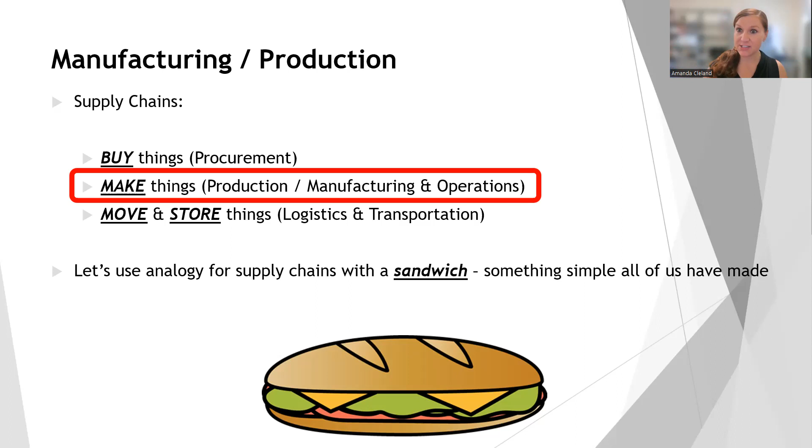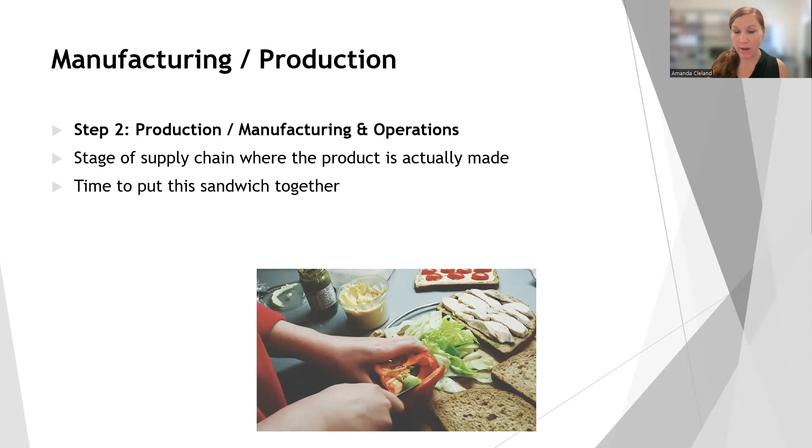So let's go back to that original sandwich analogy, something very simple we've all done in our lives. Let's talk about the production and manufacturing of making a sandwich. This is where we actually make our product, putting the sandwich together. Right now we just have a bunch of loose ingredients that mean nothing unless we put them all together in the right order, in the right format. This is production and manufacturing.

Some big things we've got to ask ourselves before we start the process: do we have the correct tools and equipment to make the sandwich? Do we have the right places to store the ingredients to keep them fresh until we actually make it? And the timing of when we make the sandwich - do I make it the night before, in the morning, two weeks in advance, or six months in advance and freeze it? Whatever the case, we've got to think about when we're going to do it.

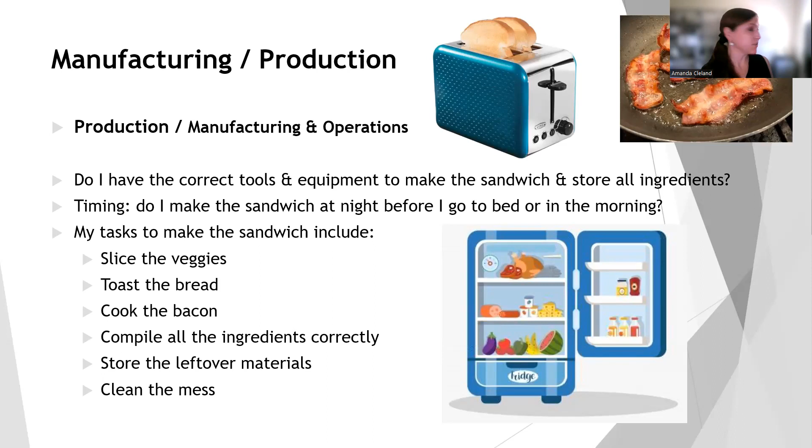Let's break down the tasks we need to make the sandwich - a really good quality sandwich, not like a crappy peanut butter and jelly. We're going to slice the veggies, toast the bread, cook the bacon, compile all the ingredients correctly and in the right order, and then store all the leftover materials and clean up the mess that occurs. These are all the things we've got to think about. Apologies, looks like the power has gone out, so bear with me.

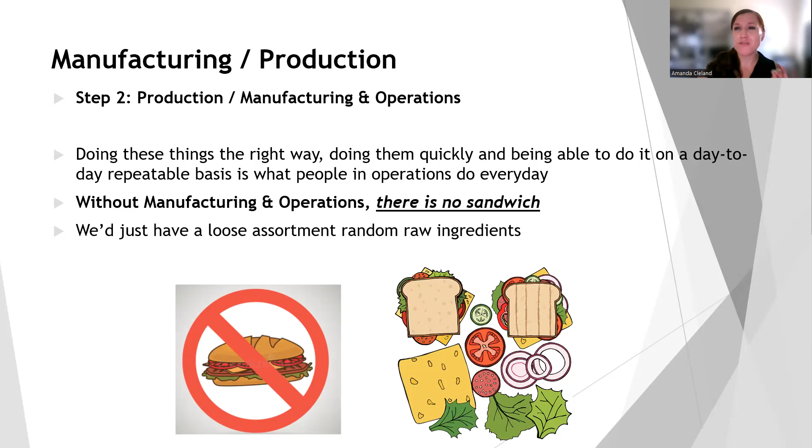Without production and manufacturing, we don't have a sandwich, a product, or a service - we'd just have a loose assortment of random raw ingredients, not a good quality sandwich. Doing these things we just talked about - when to make it, how to make it, storing things properly, compiling them properly, doing it the right way, quickly, and repeatably over and over again - is what people in operations do every day. This is where our product or service comes to life, so it's a very important stage of the entire process.

So let's talk about manufacturing. Let me move myself so you can see the actual definition. This is going to be very important - I guarantee you will see this on the test. Manufacturing is the large-scale production of goods that converts raw materials, loose parts, and components into final finished goods, using machines, tools, human labor, chemicals, etc. Manufacturing is a huge, integral part of the economy.

In 2021, manufacturing contributed $2.3 trillion to the US GDP, which is 12% of the US GDP. And again, we're not even one of the biggest manufacturing countries. It is over 10%, 12% of the US total GDP in 2021. So it's very important to our economy.

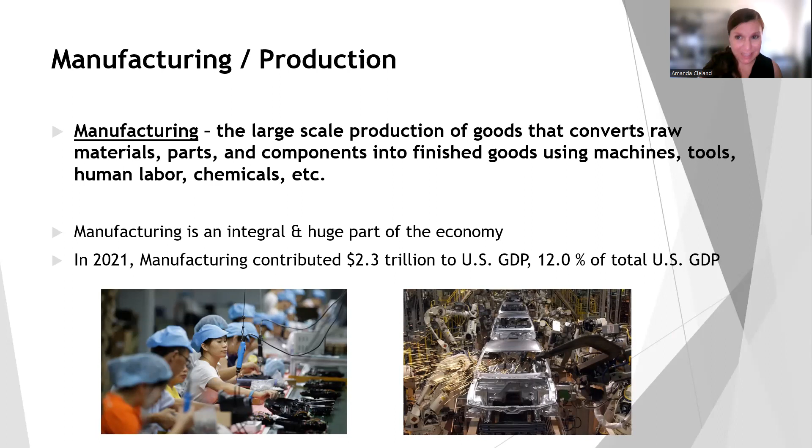Manufacturing is the large-scale production of goods that converts raw materials, parts, and components into final finished goods using machines, tools, human labor, and even chemicals.

So let's talk about manufacturing. The word manufacture is actually derived from Latin, as many words are, from the two words manu and factus. Manu essentially means hand, and what it translates to in Latin is made by hand.

Most objects that we use every day are the result of manufacturing. The computer I am recording this on is made through manufacturing. The device you are watching this on is made through manufacturing. The chair behind me is made through manufacturing. The mouse I have is made through manufacturing. The garments we are all wearing are made through manufacturing.

Manufacturing is that step within supply chains where products come to life. This used to be just loose threads, loose material, and now it is actually a garment that can be worn and is a final product. Manufacturing involves the processing and refinement of raw materials into finished products - it's making it come to life.

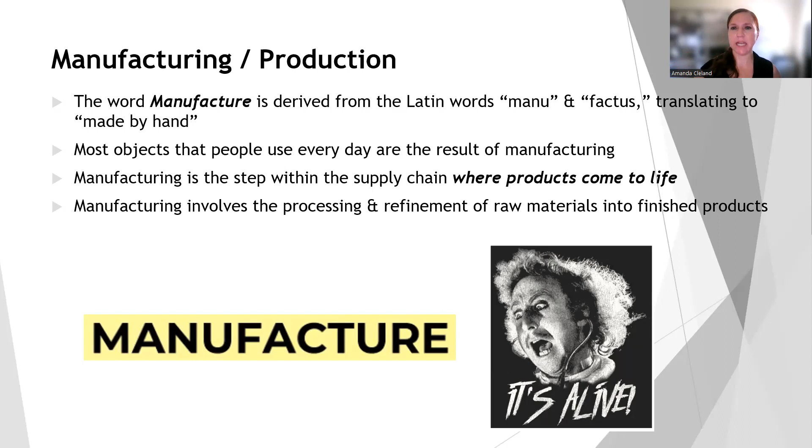Let's give some examples of raw materials. We've got raw iron ore - you can see a picture, just literally raw rock. It has no value to us just as a rock on its own. But once it goes through that manufacturing process, it becomes a metal good that is of use to us. I think the metal good I have here is some patio furniture where you can sit out, have a beer, have a burger with your friends on a nice summer day. The raw iron ore has no value to us, but once it goes through the manufacturing process, we get the final finished product that has value.

And then we've got wood - there's a ton of stuff made out of wood, lots of furniture. Just a log in and of itself doesn't have a lot of value. Yeah, you could use it for firewood, but it doesn't have much value for most everyday people. However, once it goes through that manufacturing process and becomes a quality piece of furniture, that has value.

And then all the foodstuffs that we eat - all those raw ingredients like flour, oil, milk, baking soda - you can't eat those just raw on their own. You've got to put them all together and cook them correctly to have that delicious Twinkie that you see there. So everything needs to go through some sort of production manufacturing process that adds value and creates that final product that is actually of value to us as the final consumer.

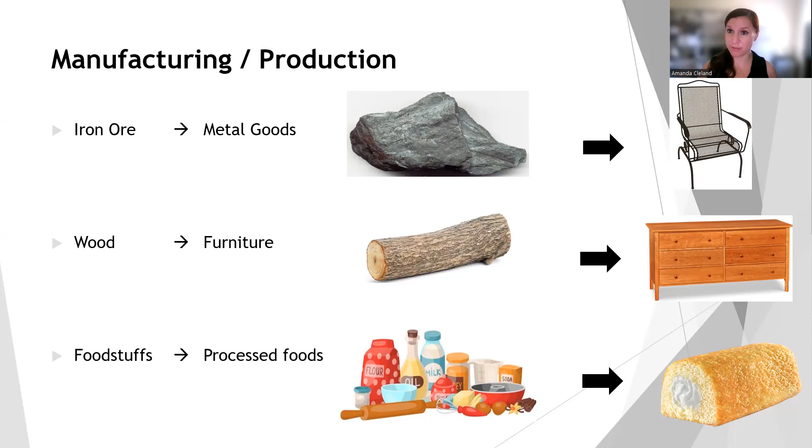Manufacturing converts raw materials into something more useful that adds value. You are not going to get a ton of value from a bag of loose flour, eggs, and baking soda, but you are going to get value from that final finished cake. This added value increases the price of finished products, and it makes manufacturing an incredibly profitable part of the business chain.

Manufacturing processes are used to make everything that we buy, ranging from apartment buildings all the way to the pen that perhaps you're writing notes with. So manufacturing is all around us, and it's an integral part of our economy.

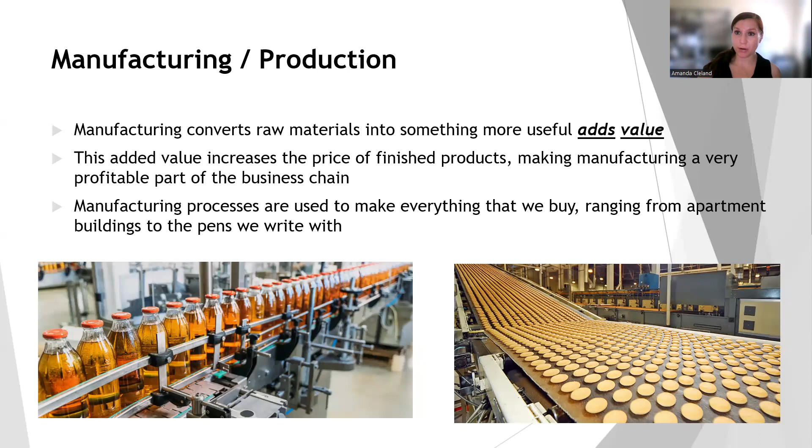So you guys know I love doing my countdowns. Let's talk about the top 5 manufacturing countries in the world, based on 2019 data - I couldn't find anything more recent, I'm assuming because of COVID, but we're going to use this data to begin with. This is from UN statistics data. So which countries, just taking a guess, do you think are the top 5 manufacturing countries in the world? Think about that for a little bit and we'll go through them. So we're going to start off with number 5.

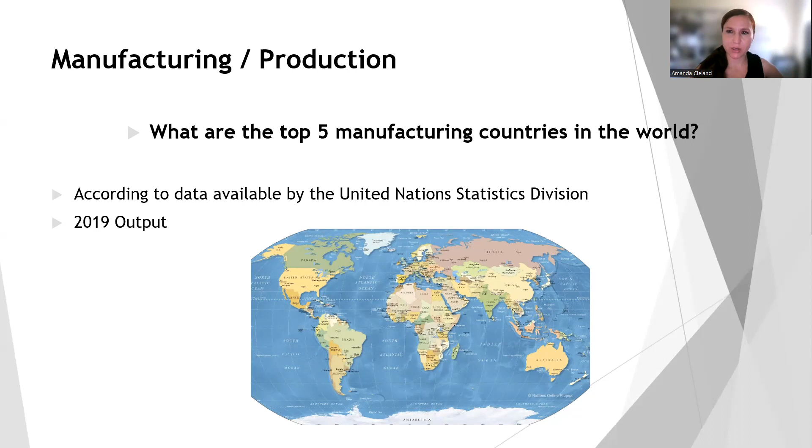Excuse me, we're going to start off with number 1. I think this does not come as a surprise to anyone: China. They have almost a third of the global manufacturing output, 28.7% of the world's global manufacturing output.

The United States used to be the world's top manufacturing hub, but China overtook that spot in 2010, so it's been almost 15 years since we've had that top spot. China, of course, has a lot of people, the most populous country with approximately 1.4 billion inhabitants, and a very entrepreneurial economy. It's one of the best places to do business due to its low costs. So number one on our list is China.

I don't think this comes as a surprise to many people. A lot of manufacturing happens in China. I think if you look on the bottom of a lot of products, it says 'made in China.' Not surprising whatsoever.

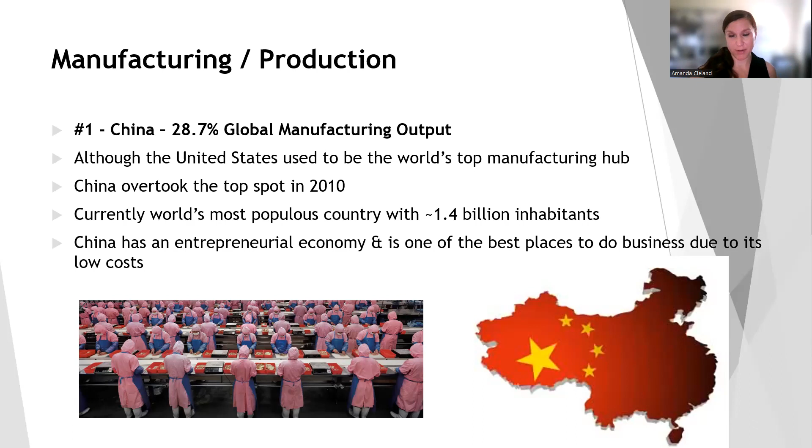So let's do number two. Number two is actually us, the United States. We have 16.8% of the global manufacturing output, and manufacturing comprises about half of all the exported goods we produce.

Our peak of manufacturing was 1979, many years ago, before I was born, before you were born. That was the pinnacle of manufacturing employment in terms of the number of Americans employed in the manufacturing sector. At that point, 19.4 million Americans were working in that sector. That's probably why a lot of your grandparents used to work in factories. However, we've got automation, robotics, computer technology.

We don't need as many people, so output has actually increased since then, even though the number of people employed in the manufacturing sector has decreased. So yes, the United States is number two in terms of the countries that manufacture the most.

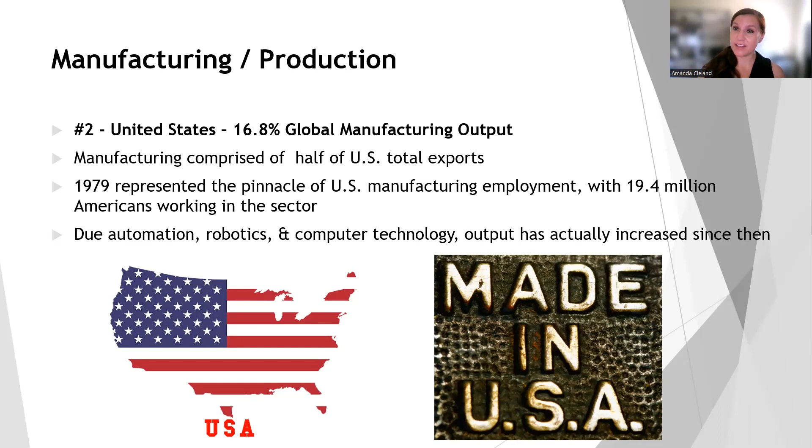Okay, let's go to number three. Oh, and here's some things about the types of things we manufacture based on the millions of dollars they cost: chemical products, computer and electronic products, believe it or not, food, beverage, and tobacco products, motor vehicle products, metal products, machinery, aerospace, petroleum and coal products, and plastics and rubber products.

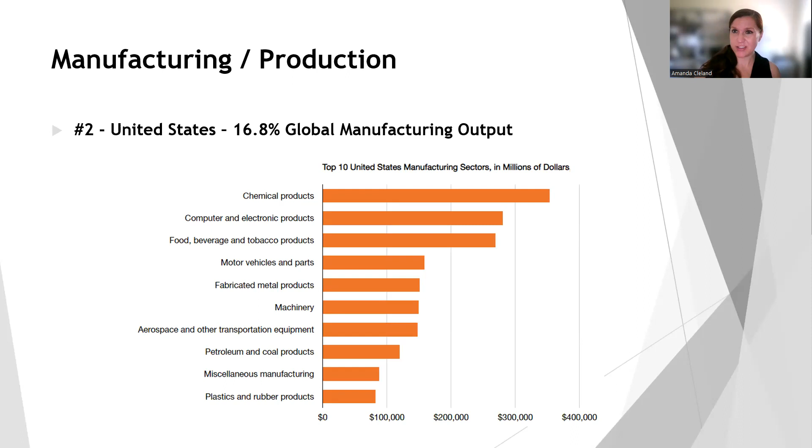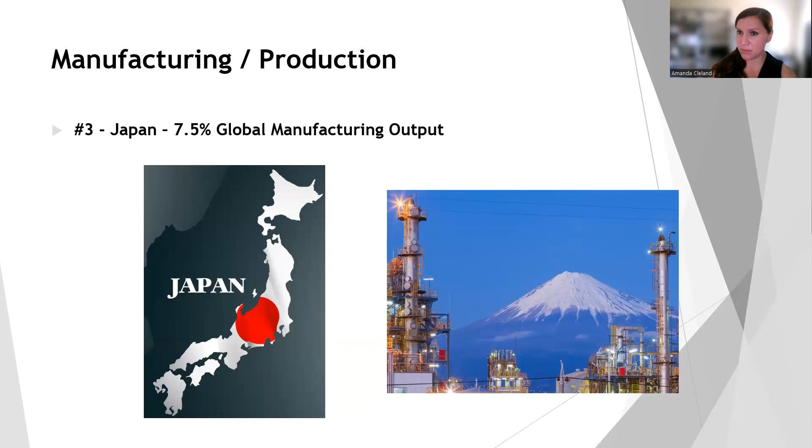So a wide variety of different things that we in the United States manufacture, just a little breakdown. Okay, number three is Japan. They have 7.5% of the global manufacturing output, which is really surprising because Japan is a very small country in terms of land mass and people, especially compared to China and the United States.

Number four, we've got Germany. They've got 5.3% of the global manufacturing output, and the German economy promotes the free market, so it makes sense, especially in both the business and consumer goods sectors. So Germany is number four on our list.

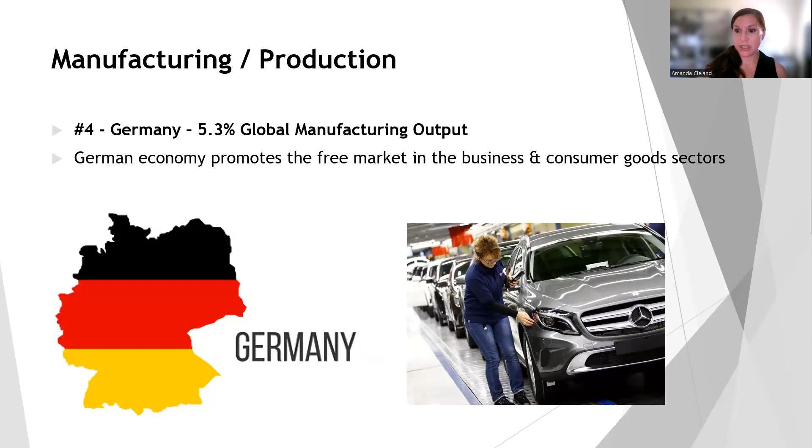And let's bring in the rear with number five: India. They've got 3.1% of the global manufacturing output. Usually when we think of India, we think of outsourced IT support or customer service centers when you call up to complain and get someone working in a call center with a very strong Indian accent. However, they are also known for their manufacturing. They had over 412 billion in 2019 from their manufacturing output.

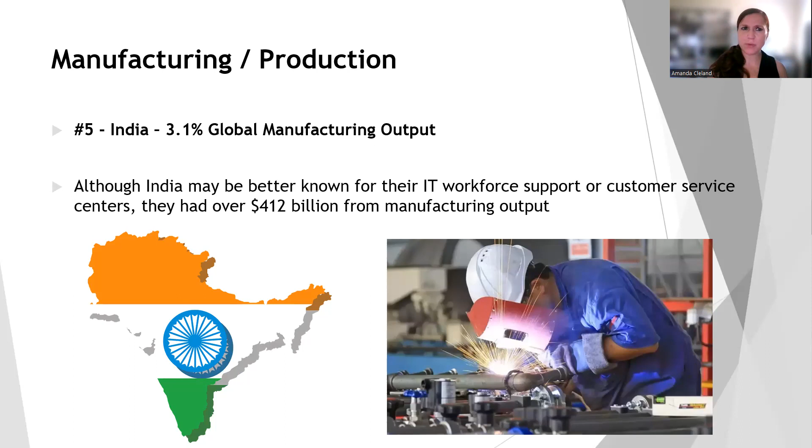So that is the top five: China, US, Japan, Germany, and India. I know a lot of people assumed smaller Asian countries would be on this, but you see the top five. Here's just a list of the top five so you can see it visually.

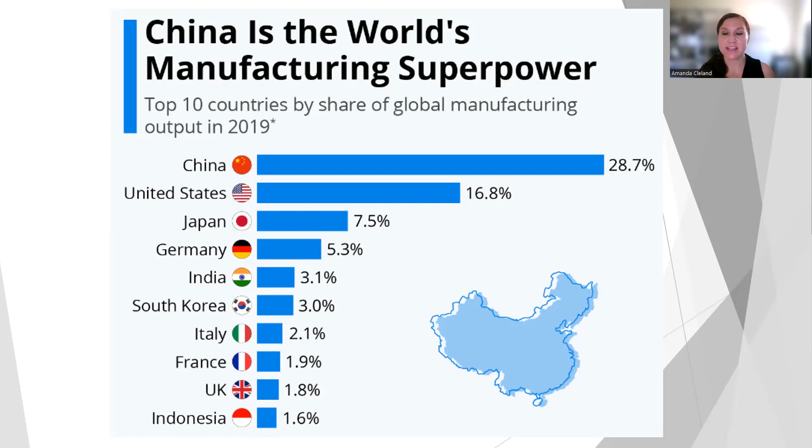And then after that, we've got South Korea with 3% of the global manufacturing output, Italy with 2.1%, France 1.9%, UK 1.8%, and Indonesia. So we actually see a lot of European countries on this list with Germany, Italy, France, and the UK, a lot of manufacturing taking place in these countries.

So let's talk about the history of modern manufacturing. Let's go back to the Industrial Revolution. This was a time when society moved from creating goods by hand and we started using machines.

This really occurred in Europe, primarily Great Britain, and in continental Europe, and also in the US. There's varying timelines that different experts will give you, but from about 1760 to 1840, and that marked the transition from human labor, everything done by hand, into machinery and chemical manufacturing processes.

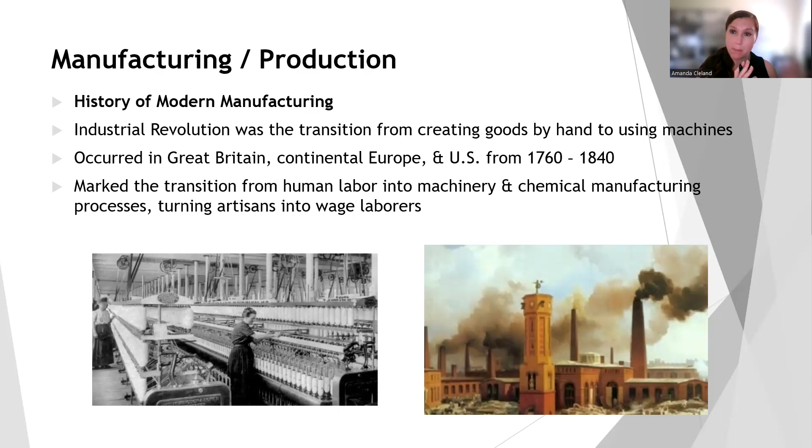So this turned artisans, people making things by hand, into wage laborers. Before the Industrial Revolution, everything was handmade products dominated all of our markets, and each individual product was made individually by hand by someone.

So you think, oh, how quaint, how nice, this must have been fantastic workmanship. But think about that—that is a very time-consuming process. And also it's going to be riddled with inconsistencies between the different final products, because each one is made by hand and there's going to be different things that happen with them.

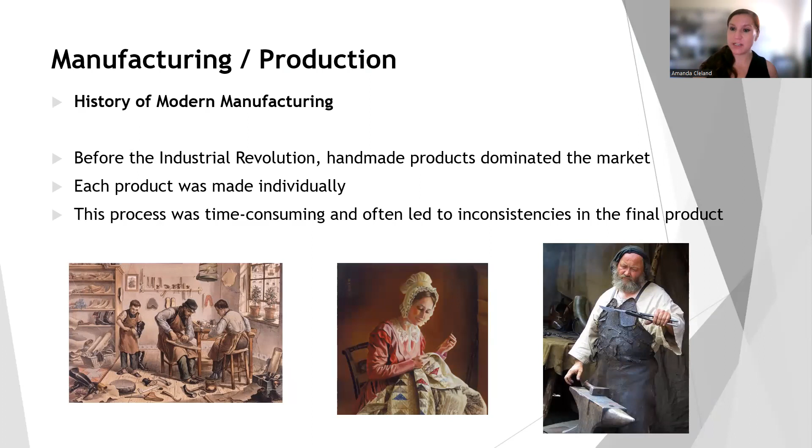So this is pre-industrial revolution. Then we had the invention and improvement of steam engines and other types of technology where companies could easily adopt machines in the manufacturing process. So we could increase the volume of finished goods, and it reduced the number of workers needed to produce them. We were really getting economies of scale—we could produce a lot for not a ton of money and not using a ton of labor.

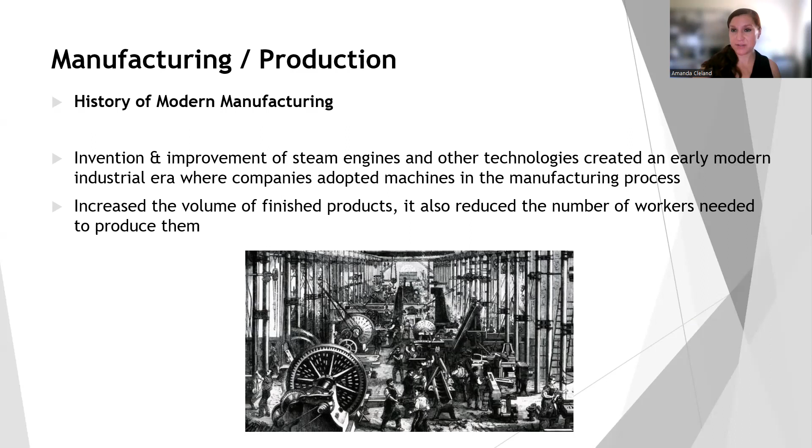This was a huge change in how things had been done before—a very labor-intensive, time-consuming process to make things—to much more streamlined. And we have economies of scale where we're making more with less.

So the next shift in manufacturing was the introduction of the assembly line in the early 1900s. The very first assembly line was patented not by Henry Ford—most people think Henry Ford, and we're going to talk about him—but it was actually patented by a guy named Ransom E. Olds in 1901. He was a car manufacturer, and he's actually the namesake for the Oldsmobile.

However, it wasn't the assembly line that we're used to now. His assembly line was stationary, so it stood still, and the workers would move around the assembly. But this was the first new approach in putting automobiles together.

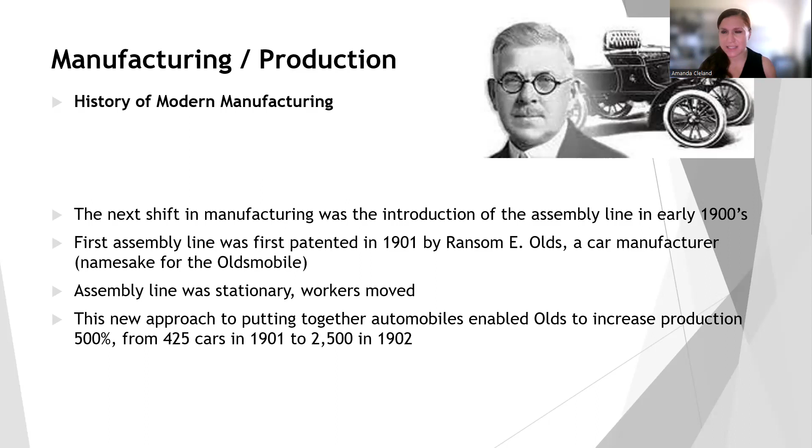And it enabled Ransom E. Olds to increase production by 500%. So in 1901, his company was able to manufacture 425 cars, and by 1902, using this stationary assembly line process, he was able to increase that to 2,500. Huge increase in production. Again, we take this for granted that cars would use assembly lines, but this was new and groundbreaking.

So the next one, we're going to talk about Henry Ford. He is credited as being the father of the modern assembly line, as well as the father of mass manufacturing in vehicles, in automobiles. He took the Olds assembly line system and improved upon it—he used moving platforms and a conveyor system.

And again, it was only just 10 years after Olds had patented his. So on December 1st, 1913, Henry Ford installed the first moving assembly line for mass production of the entire automobile. And this reduced the time to build one of his Model Ts from 12 hours to only an hour and a half—a huge improvement.

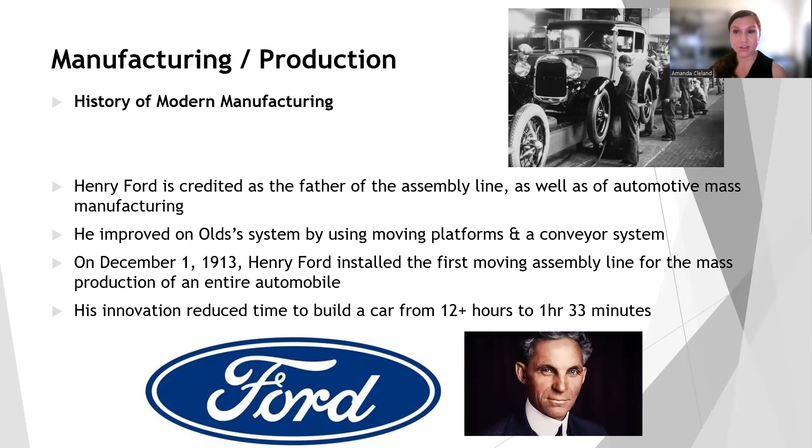What Ford did is he broke down the Model T's assembly into 84 very discrete steps. And he trained all of his workers, who were all unskilled—these weren't mechanics, these weren't experts in anything. They were unskilled workers, and all he did was teach them just how to do one of these different 84 steps. He also hired a motion study expert, Frederick Taylor, to ensure jobs were done more efficiently.

So how it worked in the beginning, back in 1913, is that the Model T vehicles were towed by rope and they would move them from station to station. This way, workers could simply assemble the different pieces as the partially made vehicles arrived at their different stations. Again, groundbreaking—it made everything so much quicker.

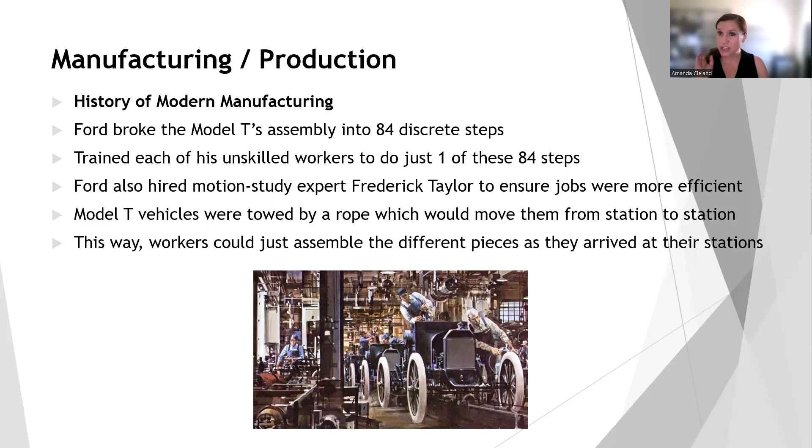And again, you didn't have to have someone who knew how to make a car all the way from bare bones to the final product. All you had to do was train them on one single step, which had never been done before. And prior to this shift in how he manufactured his vehicles, cars were an extremely expensive luxury item.

Only the elite of the elite, the 1%, the creme de la creme, could afford a vehicle. The Model T was fairly expensive when it was first released in 1909, before Ford introduced the assembly line process. Initially, the cheapest price was about $825, which is about $18,000 in today's currency. So not crazy.

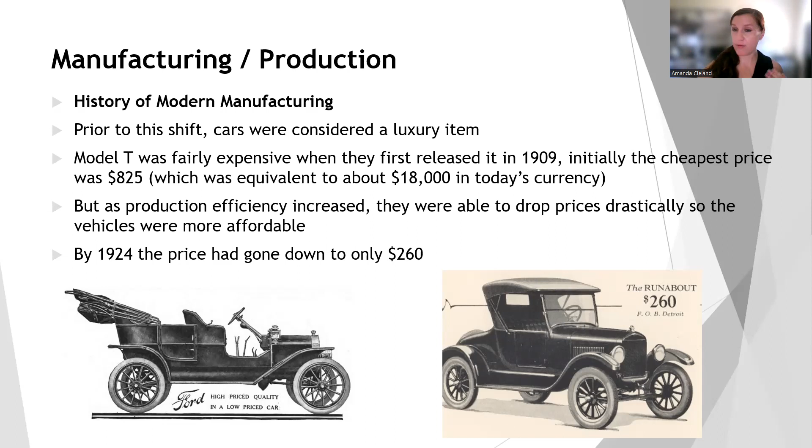But as production efficiency increased, they started using assembly lines. They were able to make it quicker, cheaper, and Ford was able to pass those savings on to the final consumer, so vehicles were more affordable. By 1924, just 15 years after that first car came out, the price had gone down to only $260, down by almost two-thirds. Crazy how affordable these became for just the average person.

Let's go to the next one. The next big breakthrough in manufacturing is Toyota. In 1948, Toyota Motor Corporation developed what they called lean production. We're going to talk a lot more about lean later in this chapter.

You probably have heard the term just-in-time, JIT manufacturing. That is closely synonymous with lean production, and also the Toyota Production System, TPS. This was developed by Toyota in order to improve the flow of production by finding, identifying, and eliminating any kind of waste. The Japanese word for waste is muda.

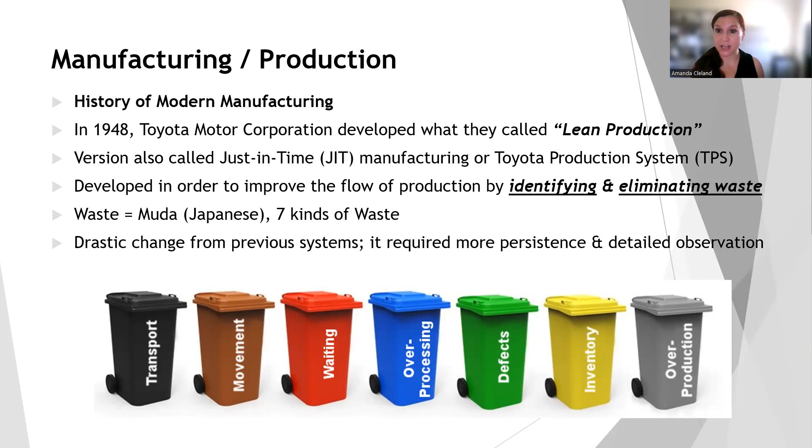Under lean production, there are seven different kinds of waste: transport waste, movement waste, waiting waste, overprocessing waste, defects waste, inventory waste, and overproduction waste. We're going to talk a lot more about that. But it was a drastic change from previous systems, and it required a lot more persistence and detailed observation. This was the next big breakthrough, in 1948.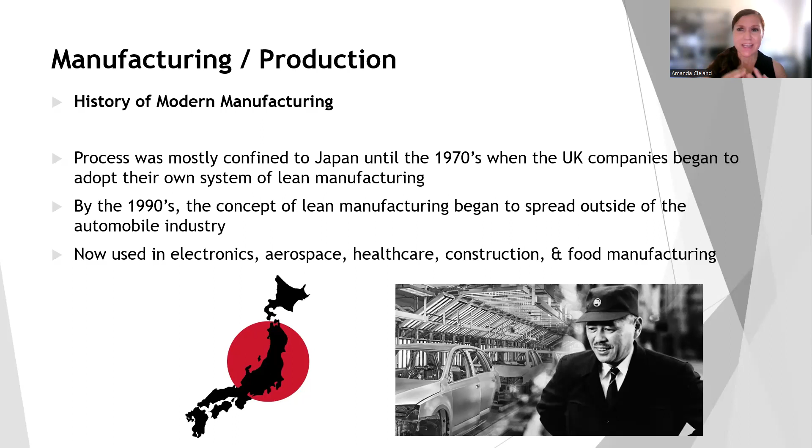The process was mostly confined to Japan until the 1970s, when UK companies decided to start adopting their own version of lean manufacturing. By the 1990s, the concept of lean manufacturing had begun to spread outside of the automotive industry. From 1948 to about the 1990s, it was mostly confined to the automotive industry, but by the 1990s it spread to all sorts of things. Now you see lean concepts used in electronics, aerospace, healthcare, construction, food, even services. So lean is used everywhere now.

Now we've got the rise of robotics, the rise of automation, and the rise of what we call smart manufacturing. The first robots started to appear on American assembly lines in about the 1980s. Today we have all sorts of automated manufacturing that uses advanced robotics, big data, and incredibly sophisticated computer software. It can complete tasks much faster and much more precisely than humans ever could, and it can do it 24 hours a day. They don't need to take bathroom breaks, they don't need to rest. So this is where we're at now: the rise of robotics, automation, smart manufacturing.

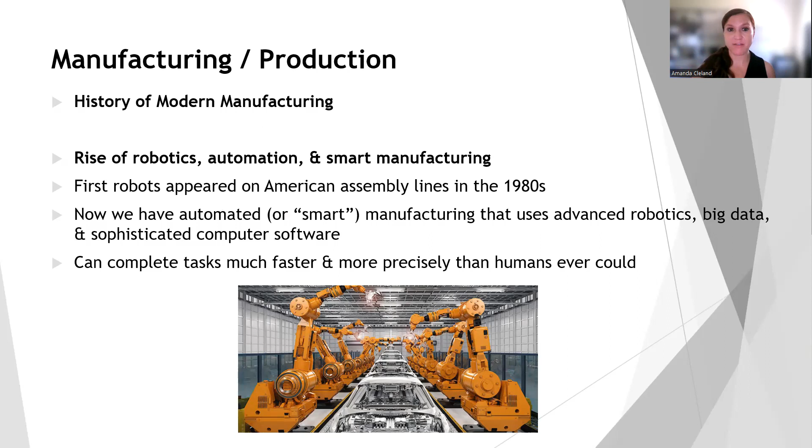Okay, so we've been talking about manufacturing. Now let's talk about production. Again, the two are very closely related, and we're going to talk about what the differences are.

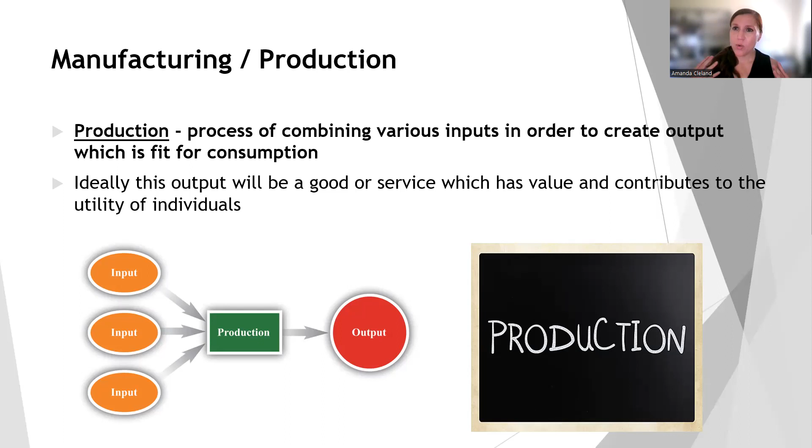Production is the process of combining various inputs in order to create output which is fit for consumption. We're going to have a final product. Ideally, this output is going to be some kind of good or service which has value and contributes to the utility of individuals. So again, very closely related—it sounds very similar to the definition of manufacturing, but we're going to talk about what the difference is between production and manufacturing.

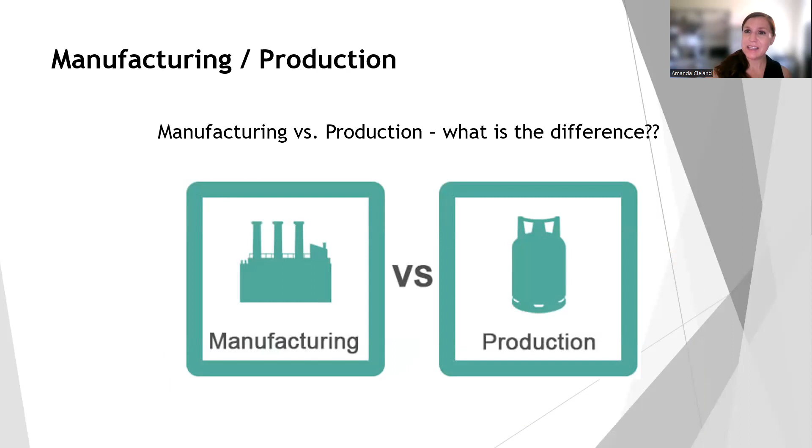They sound very similar, right? Manufacturing, production—we're talking about them all now. Let's talk about what the difference is, and this is going to be very important. Every type of manufacturing falls under the production umbrella, so every type of manufacturing is production.

The biggest difference is that in manufacturing, we need machinery—there is going to be machinery used. In production, machinery may or may not be used. That is the big difference: manufacturing uses machines, production may or may not use machines. Also, in manufacturing, the result is a good, only a good. In production, the final result can be a good or a service. So these are the three big differences between production and manufacturing.

So, very important to remember, and I guarantee there will be a question on the final with this: know the difference between production and manufacturing. Manufacturing requires machinery, production doesn't necessarily need it. And in manufacturing, the final product is goods, whereas in production, the final product could be goods or services.

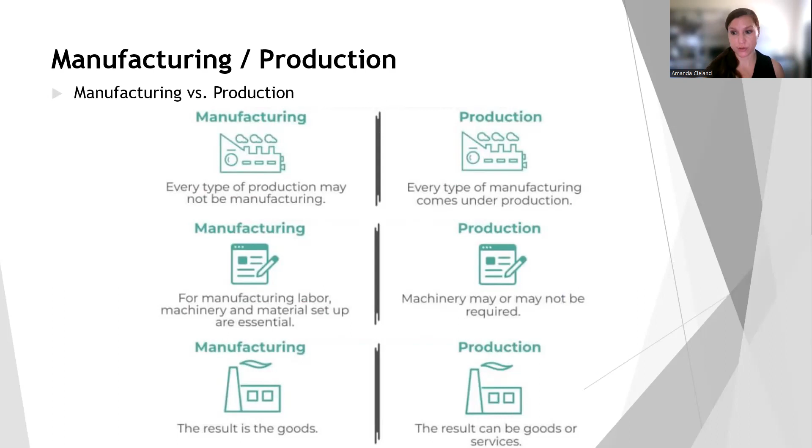Let's talk about some different principles that we can apply in manufacturing and production. Some products are manufactured according to forecasts, where they're not going to have specific sales orders already input. We're going to use our sales forecasting that we talked about many lessons ago. Other product manufacturing only starts after we actually receive a sales order.

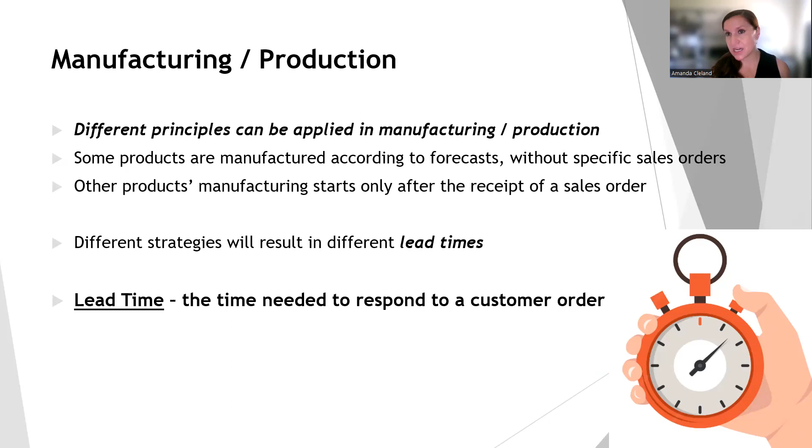Different strategies are going to result in different lead times. A lead time is the time that we as a business need to respond to a customer order—from the time you input that order, to the time we actually deliver it to you. That is the lead time.

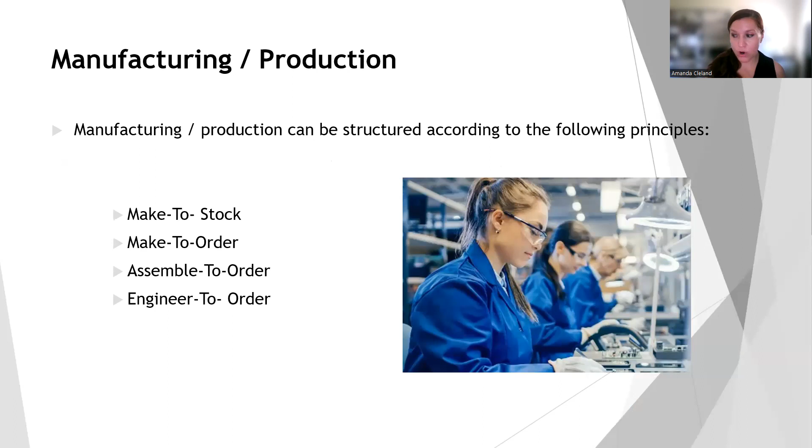We can structure these according to different principles. We could either do make to stock, make to order, assemble to order, or engineer to order. Let's talk about all four of those.

Let's talk about make to stock first, and you're probably going to see the acronym MTS. This is the very traditional production methodology where we are going to produce products in advance and stock them as inventory. They're going to sit on a shelf somewhere until a customer actually buys them.

Oh, and the lights came on. Yay. And again, this is based on demand forecasts—we're going to do sales forecasts, and then we're going to manufacture according to that.

Usually our products are created in very large batches, and again they're held in stock—held in the back room, held on a shelf, held in a warehouse—until they're actually needed. Usually these types of products made with a make to stock methodology have a very low level of customer specificity, so you're not going to be able to put in special orders or unique things. They have a very high degree of standardization.

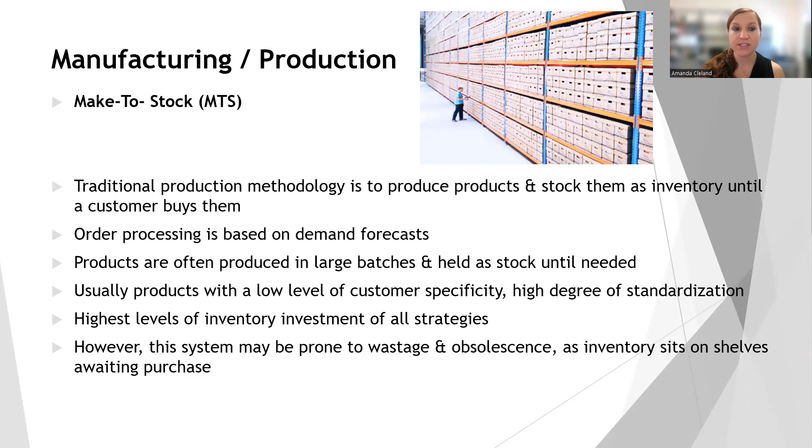They also have the highest levels of inventory investment of all the different production strategies. We're going to be spending a lot, and a lot is going to be tied up in inventory. Because of this, make to stock is prone to waste and prone to obsolescence, since we have so much inventory sitting on shelves awaiting our final customers to actually purchase them.

This really started with the idea of mass production in the early 20th century. It came from the practice of producing a high volume of identical goods at low cost, created in large numbers, in anticipation of future demand based on the forecast we create, and keeping them in inventory for a later sale.

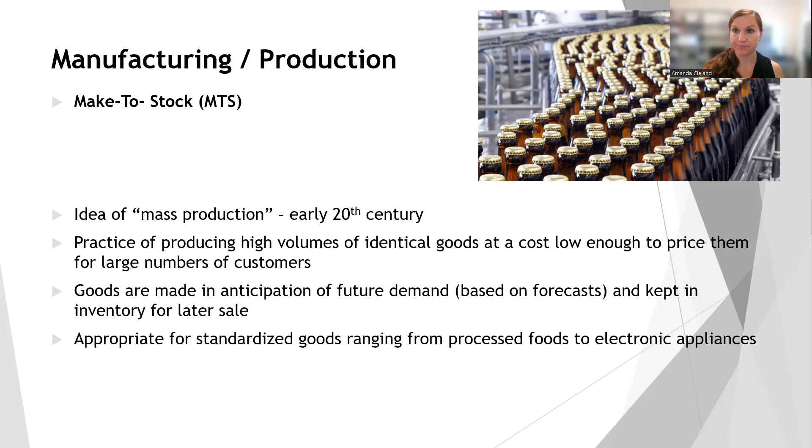It's really the appropriate production strategy for standardized goods, which can range from the foods we eat to electronic appliances. Really, fast moving consumer goods are a typical example of a make to stock item—toothpaste, soap, cookies, makeup. These are all non-durable consumer goods that sell quickly and at a relatively low price. Companies like Nestle, PepsiCo, and Procter & Gamble typically utilize a make to stock strategy. So these are the types of things we would use a make to stock strategy for.

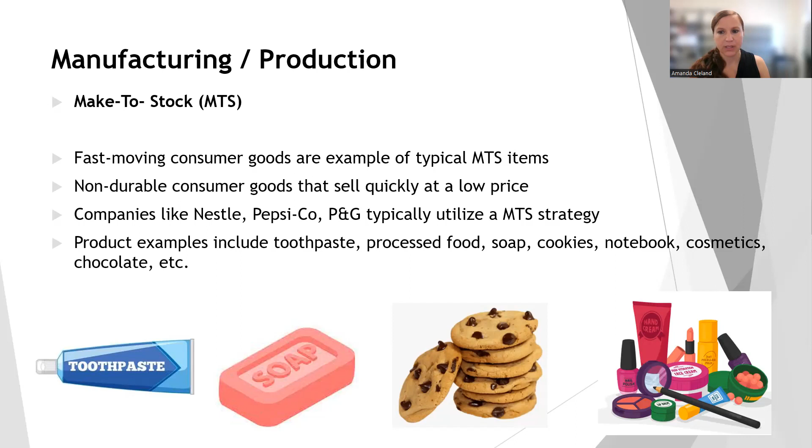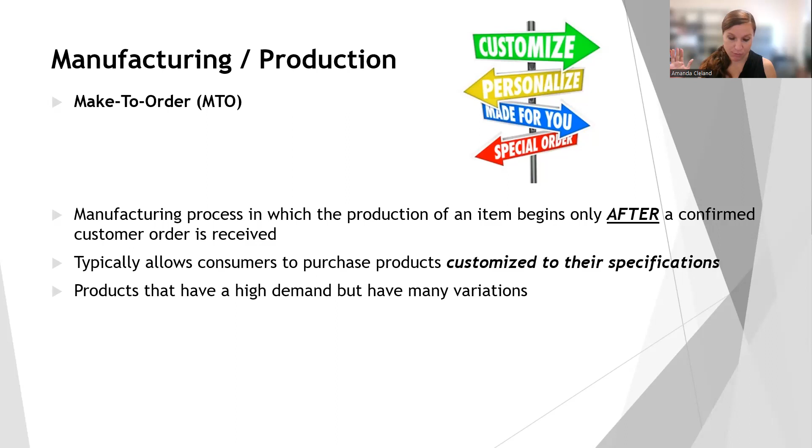Okay, now we've got make to order. The manufacturing or production process for these types of items begins only after we actually receive a confirmed customer order. These typically allow you to purchase products that are customized to your exact specifications—you can personalize it, special order it, customize it exactly how you want in a make to order process. These are products that usually have very high demand, but usually have a lot of different variations. If we made all identical ones, it would not be ideal.

The advantage of the make to order process is we're going to have a lot of enhanced customization level. And also we're not going to have a lot of excess inventory. We're only going to produce the product once a customer actually puts the order in. So we've got better productivity and a lot of variety in the things that we're doing. They're not going to be all identical.

The major drawback of this strategy is there's going to be a substantial time lag between the placing of the order and its delivery, because we've actually got to create it now. We don't start the process until the customer puts the order in. So it's really only ideal for commodities that have a very short manufacturing cycle, not years or months that you're waiting for your product. Hopefully it's only days, maybe weeks.

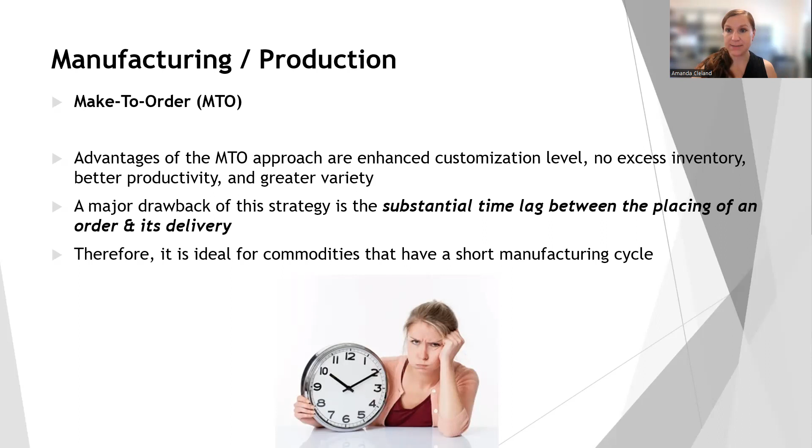The wedding industry, I know hopefully none of you are married right now, because weddings are very expensive and that's a big commitment to make. But the wedding industry is an example of an industry that thrives on make to order. Each wedding, each component of the wedding, is custom tailored to the whims of the bride and groom, probably the bride. So wedding dresses, flower bouquets, wedding cakes, favors, are all going to be made to order to the exact specifications of whatever you want. So the production doesn't start until that order is put in, and it can be made exactly how you want it.

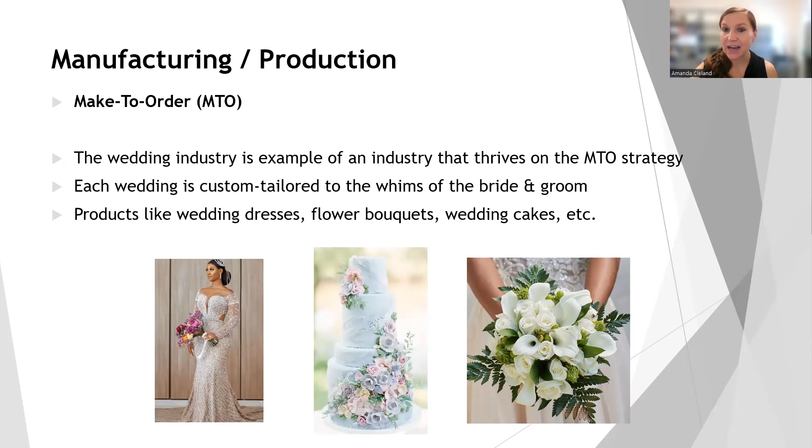So let's talk about assemble to order. This is kind of a hybrid, a combination of make to stock and make to order. What this entails is that the manufacturer strategy is where the manufacturer stocks up on all the parts, all the inventory, all the nuts and bolts needed to compile the final product. They have those on hand in inventory, and then they assemble the final product when a customer actually places an order. So products can be customizable to a certain extent. This relies on the company's ability to assemble and deliver the goods very quickly, and it usually takes a longer time to deliver the final goods to the customer, very much like a make to order strategy.

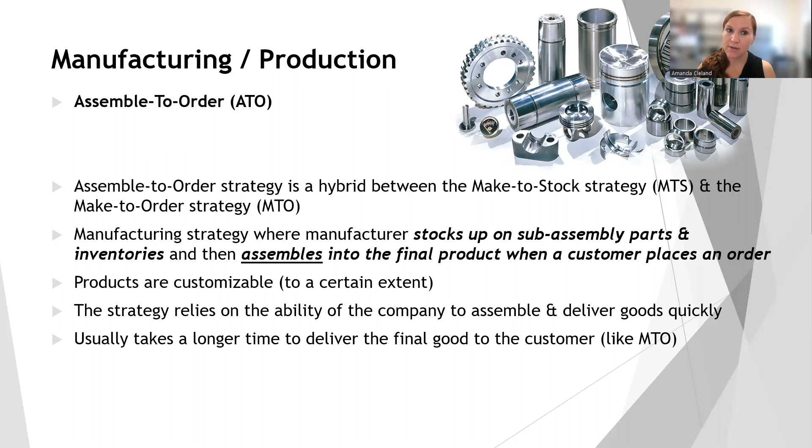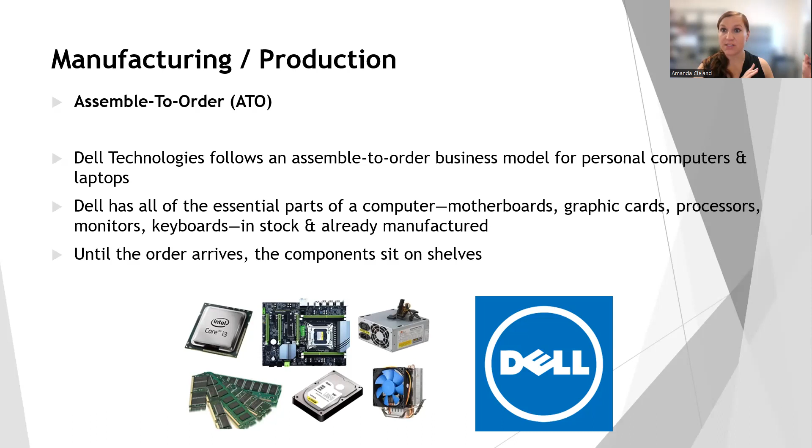So a company that employs an assemble to order strategy is Dell. Dell Technologies follows an assemble to order business model for personal computers and laptops. I actually have a Dell and I'm very happy with their assemble to order strategy. So Dell has all the essential parts of a computer - the motherboards, the graphic cards, the processors, the keyboards, the monitors - in stock, already ready to go, already manufactured. Until a customer actually puts in an order, the components sit on the shelves separately. They're not going to put them together in a computer. They're going to sit on the shelves.

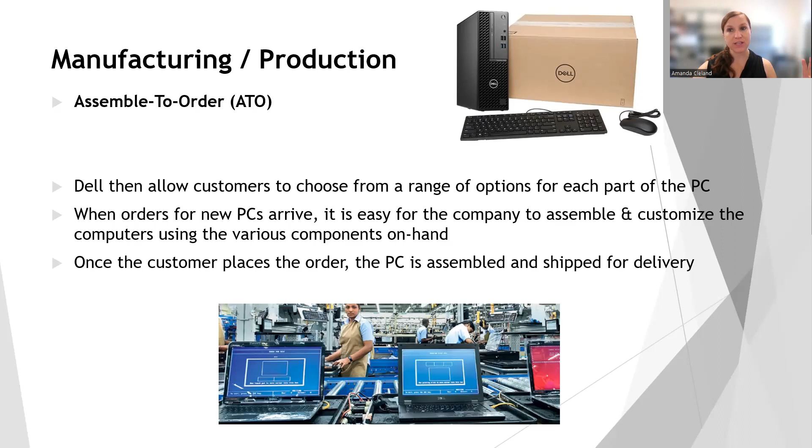And Dell allows the customer to choose from a range of options for each part of the PC, so you can choose from all sorts of different levels. When the customer finally puts in their order, the company has everything on hand and the specs that you've chosen, that you've customized, and they're going to put it all together, assemble it, and ship it out for delivery. So this is an assemble to order strategy where you've got all the components you need to create it on hand, sitting in inventory.

Our final production manufacturing process is engineer to order. This is commonly used in the creation of one-of-a-kind products, usually very sophisticated and complex type products. They usually have very unique specifications and are usually very complex. It involves the creation and engineering of a product to a customer's unique and usually very precise specifications, and again, the process does not start until after the customer order is put in. This is widely used in the aerospace sector, military, architecture, when you're creating buildings, when you're building a house - this is going to be engineered to order.

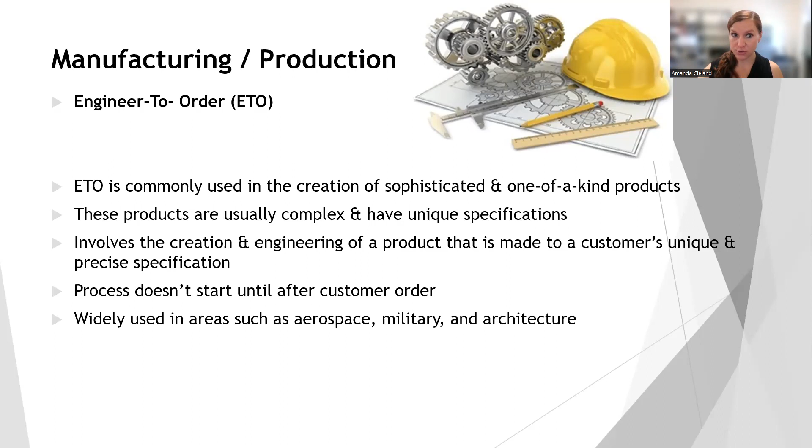So examples of engineer to order products include commercial heating, ventilation, and air conditioning (HVAC) equipment - it's got to be specified for the exact building, the exact specifications. Also electrical switchgear, power plant boilers, industrial cranes, aerospace manufacturing, so building airplanes, the defense and security industry, so making tanks, war fighter type weapons, and the energy industry. So again, usually very expensive, complex, sophisticated types of systems - not something simple like a candy bar or a computer.

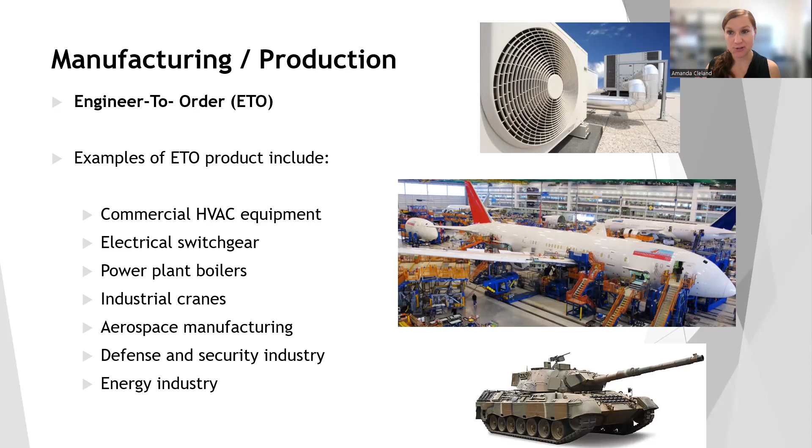These are usually buildings, airplanes, weapon systems, industrial cranes. So this usually employs an engineer to order system.

Now let's talk about push versus pull production. In push production, businesses produce products based on demand planning. Companies produce a certain amount of product to meet what we have anticipated as being the forecasted demand, and then we push our product onto the market from this established inventory, even if there is no customer order. So the company is pushing their product onto the customer. The customer did not order it yet, but we are pushing it onto them. So make to stock is a push production strategy.

On the other side, we've got pull production. This is based on actual customer orders, so production is pulled via that customer order. The customer is pulling the product out of us. In a pure pull type of system, no product is made until a completed order is made for it. There's absolutely no predicting or forecasting involved; we are depending solely on customer orders. So make to order and engineer to order are pull production strategies.

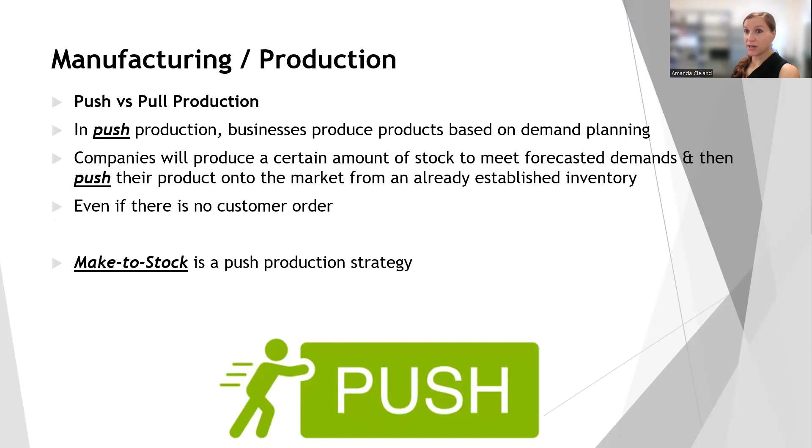So again, in push production we as the business are pushing our product onto the customer. And in pull production, the customer is pulling the product out of us as the company. These are the big two differences between push and pull. Make to stock is a push production strategy, and make to order and engineer to order are pull production strategies, where the customer is pulling the product out of us as the company.

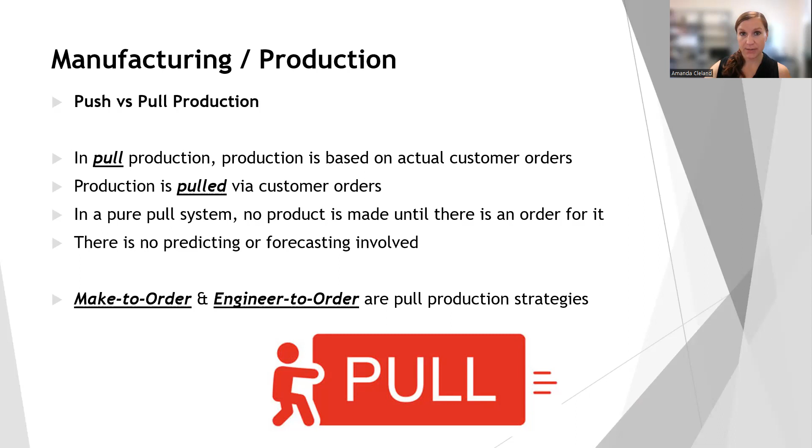A really key concept in production processes is the customer order decoupling point. This is where inventory is positioned within our supply chain. We've talked a lot about inventory - what that does is act as a barrier to separate the customer from the manufacturing process. And the closer that the customer order decoupling point is to the customer, the quicker we can serve them.

However, there is a trade-off. The quicker our response to customer demand, the larger our inventory holding costs are. If we have that inventory sitting right next to the customer, we're spending a lot in inventory holding costs - we're putting a lot of money into that inventory that's kind of just tied up.

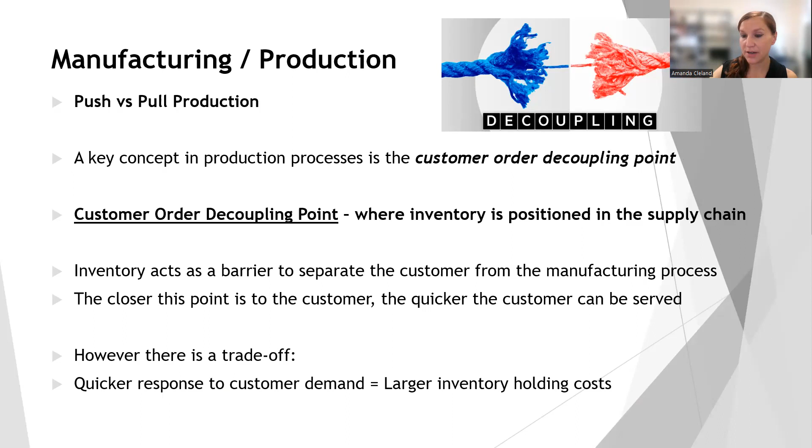Okay, so the next thing we're going to talk about is how manufacturing processes are organized. A manufacturing facility, the building that this is actually located in, can vary greatly in terms of how it's arranged. Ideally, we're going to have our equipment, our machinery, and our people all arranged in a way to make the production process as efficient as possible. And it's usually determined by the workflow pattern, the volume of products we're doing, or the level of product standardization - how similar all of these different products are going to be.

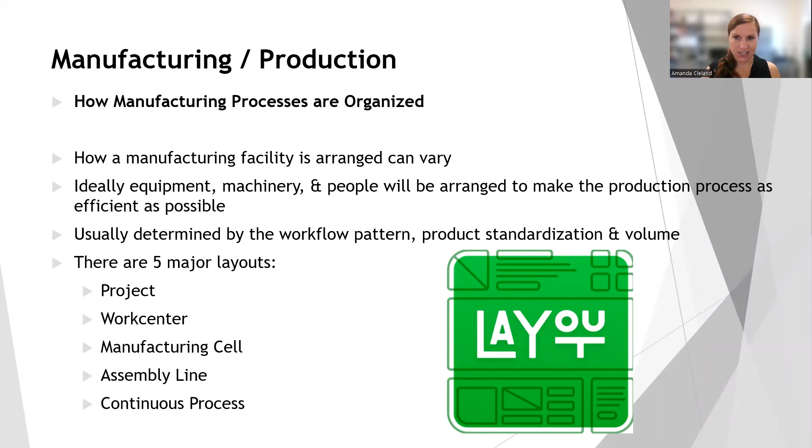There are usually 5 major layouts which we're going to talk about: the project layout, the work center layout, the manufacturing cell layout, the assembly line layout, and the continuous process layout. So let's go through each of these, starting with our project layout.

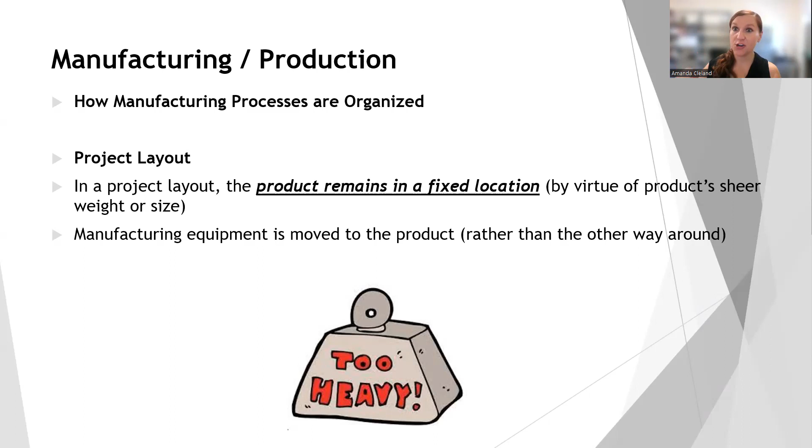So in a project layout, the product is going to remain in a fixed location, just because this product is so big, it is so heavy that it's got to stay still and we're going to move around it. So manufacturing equipment is then moved to the product rather than the other way around, like an assembly line, where we move the product and it goes to different workstations. It remains fixed just because it is so big, so heavy, in one set location.

The project layout is very common for construction sites, so for houses, for buildings, for bridges, the product itself is going to remain fixed in a project layout. Movie shooting lots are another example of this type of format. The product is fixed, and everything, the people, the equipment, is moved around it.

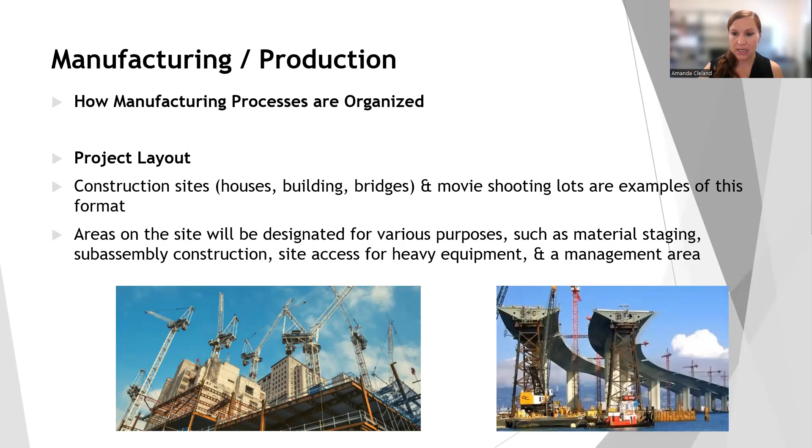Usually areas on this site are designated for various purposes. So you've got a staging area over here, maybe a sub-assembly area over here, maybe access for heavy equipment over here, maybe your management area over here. But remember, in a project layout, the product remains in a fixed location.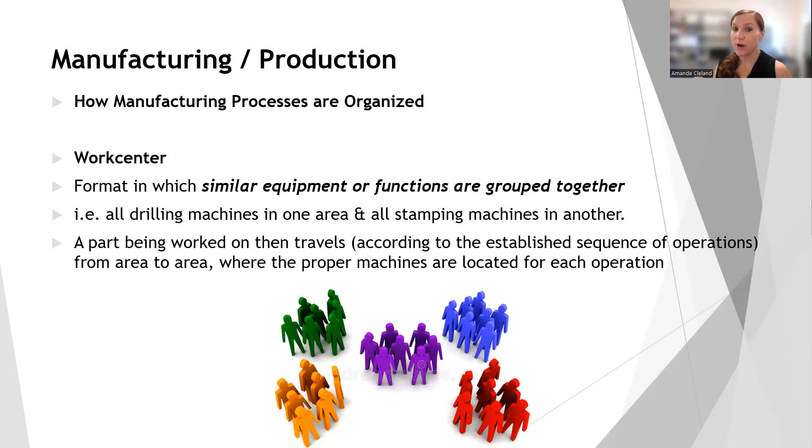Okay, our next one is going to be a work center. This is where similar equipment or similar functions are all grouped together. So for example, if we had all of our drilling machines in one area, all of our stamping machines in another area. A part being worked on will travel according to whatever sequence of operations we have, from one area to another where the proper machines are located for each operation.

A lot of times you'll see a work center, sometimes referred to as a department, and usually that is focused on one specific type of operation. We talked about drilling happening over here, stamping happens over here, or grinding operations and painting take place elsewhere.

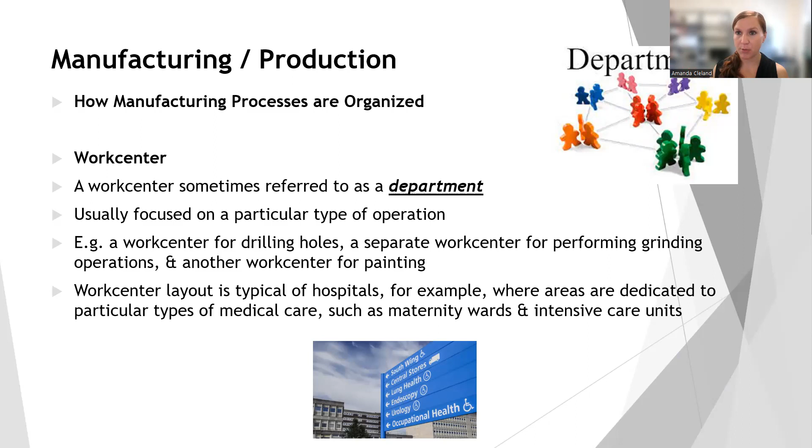An example of a work center type of organization is a hospital. This type of layout is very common in hospitals, where there are dedicated areas for particular types of medical care. So you've got the maternity ward over here, an intensive care unit over here, pediatrics over here. Each area or department is dedicated to one particular type of operation. So that is what a work center is.

And then we've got our manufacturing cell. I would call this like a mini assembly line if I were to compare it to anything. This is a dedicated area where similar products are all produced, so we've got very similar products that are going to be the end result of this entire process. And it's going to group dissimilar equipment together, usually because the product has similar shapes or processing requirements.

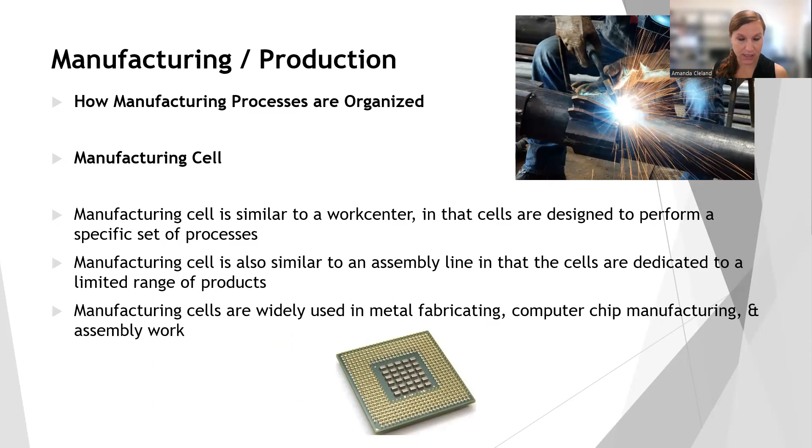A manufacturing cell is very similar to a work center in that these are designed to perform a specific set of processes. It's also similar to an assembly line in that the cells are dedicated to a limited range of products. These are widely used in metal fabrication, computer chip manufacturing, and assembly work. So that is our manufacturing cell: similar products produced, dissimilar equipment used.

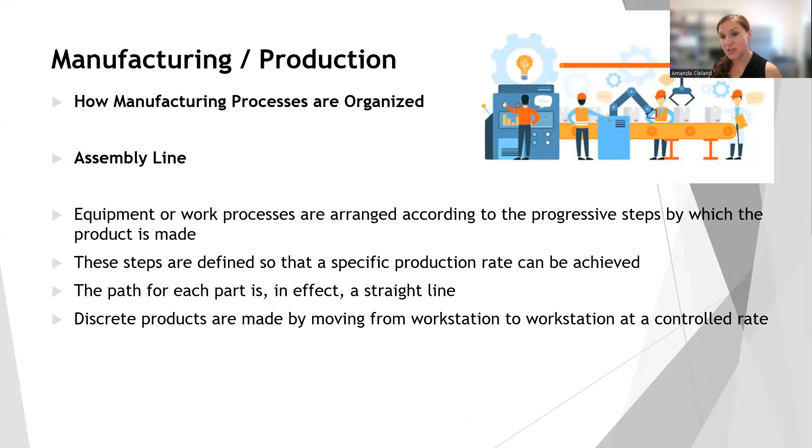And then we've got our assembly line. This is what we typically think of when we think of manufacturing and production. The equipment or work processes are arranged in progressive steps by which the product is made, and these steps are defined so that a very specific production rate can be achieved. The path for each part is essentially a straight line, so discrete products are made by moving from workstation to workstation at a very controlled rate. It's very important about that rate.

A car wash is an everyday example of an assembly line, where it's got a very set rate and you're going through all the different processes. Industrial examples that use assembly lines are toys, appliances, or automobiles. These are typically used to make very similar items without a lot of specification to them, in high volumes. Virtually any product with multiple parts produced in high volumes uses assembly lines to some degree.

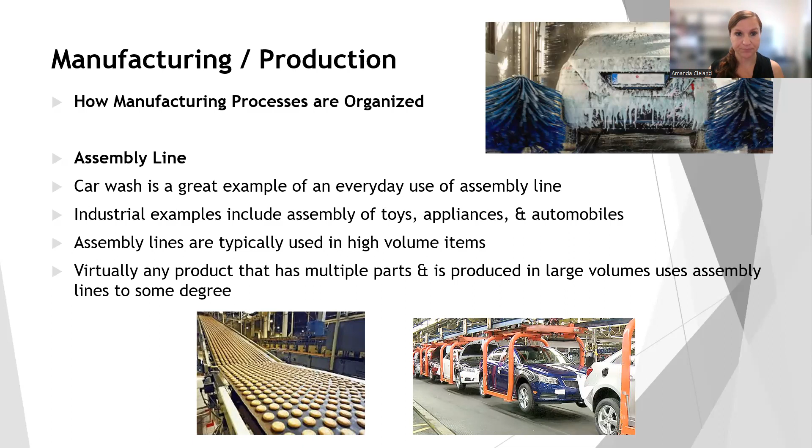Assembly lines are done in areas referred to as stations, and typically stations are linked by some sort of material handling device, like a conveyor belt or an overhead crane. Usually there's some sort of pacing so that the amount of time allowed at each station is managed. Timing the movement of products on an assembly line is imperative to ensure efficient operations.